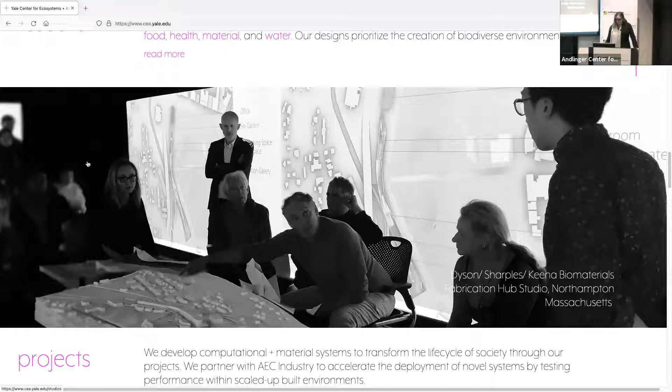And so even just the way that we look at things, we're developing new formats here as a studio in what we're calling BEAM Lab, or Built Environment Ecosystems Measurements Lab. I'll show that in a minute. And the way that we work, we've started by creating formats that are immersive, within which we can literally inhabit and understand the information with multiple people looking at it through the baggage and the lens that they're bringing to the table through their disciplinary and cultural backgrounds.

And then our first pass is, can we be under one roof, quote unquote? That was a term introduced by the Department of Energy with their big hub competitions, probably 15 years ago now. But that idea that we could have many different folks working in many different aspects. This is just a snapshot of our space, a studio where you can see there are PhD students, postdocs, research scientists, and also some design students working on different systems. They're working on plant-based air and water remediation systems. They're working on solar energy systems, but they're kind of in the same space.

So it sounds really basic, but can we occupy labs that are literally transdisciplinary, or spaces that are transdisciplinary? Of course, there's a lot of people that we work with, and the majority of the people we work with actually are not architects by training. This is just on our website, sort of the core people that we really work with day in and day out. There's a lot of other people associated with our center that are sort of the networks that each person brings to the table.

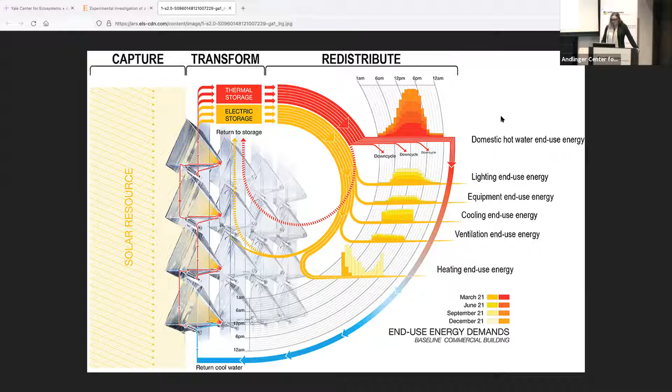And of course, you need very high quality energy coming from our conventional systems, electricity, and maybe high temperature heat to drive systems for all the things you need to do inside a building: heating, cooling, lighting, plug loads, etc. So how can we basically look at it as we are shaping energy flows, that we think about our buildings as literally transfer functions, or as building envelopes that are interdependent with the outside, and that we're going to mediate what's coming inside, i.e. on the left-hand side the solar resource, with all of the different things that we need to do on the inside.

So when we look at that, what can we do with existing technologies? This is literally an applications type of research, right? We're taking optics, semiconductors, other things that are doing pretty well on their own, trying to gang them all up together. We hadn't previously been in fundamental materials research, although we've moved over to that as well, trying to embed these ecosystemic criteria in the development of the materials themselves.

But ultimately, we've still got something like over 71% efficiency combined heat and power, if we look at what we are able to do with existing systems. But once again, at the end game of that, we're only taking care of a small slice of what we actually need to do inside the interior.

So just to go back a little bit to the context - what is the driving motivation behind this research? We tend to categorize our research in these different categories, but as architects, we need to have all of these categories and integrate them all into systems. We need to decide what the materials will be, and deliver safe, reliable energy, safe air and water quality, etc.

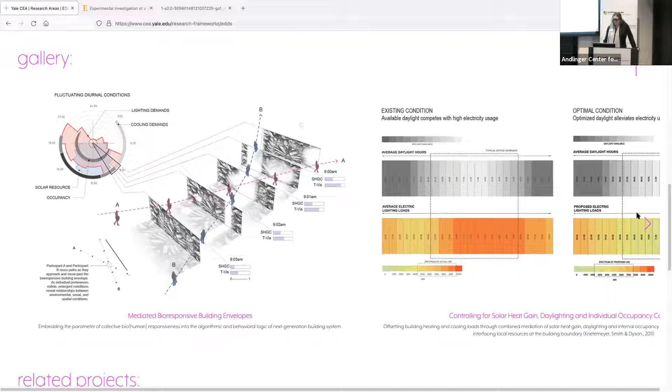Taking the exact same criteria, how do we render that building on-site net zero, or work with the type of energy that we have ambiently? That starts to send us into really looking at a kind of bioresponsive framework, tightly coupling in time lighting demands, cooling demands, and other interior conditions. But what do we have to do in order to have enough handles on the energies simultaneously?

We have to go literally all the way down to subatomic scale, and we have to think about how we are going to manipulate those energy flows. Because if we want to get to on-site net zero, all we really have is what is at that building envelope, and how we are going to couple that, or match it, with the interior conditions.

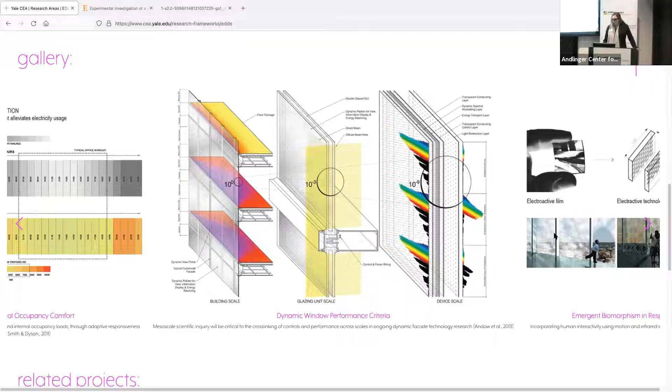So this is another visualization of how a micro scale system would work. Here we're still in the micro scale - we're not in that very, very small scale where we can do many things, but we can do a lot more than what we just showed with the IC solar facade system, which is literally just assembling the optics, the semiconductor, etc.

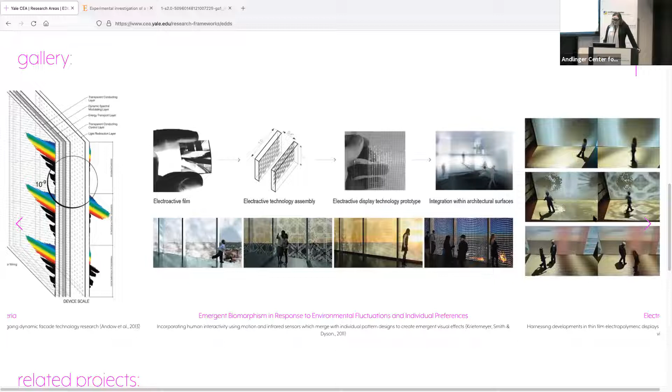What we can see is that if we want to manipulate the energy flows, there will be a relationship for sure between what we see and what we can do as a kind of cultural artifact - as we showed at the beginning, what the world will care about, and what architects will ultimately specify will be a cultural product. It will be something socially valuable, either as a technical condition or as an aesthetic or cultural condition.

But if you think about what we do on a building envelope, we do not at all need the same things throughout, let's even say a diurnal swing. We need very, very different things. So developing materials that can absorb or capture, transform, store, and redistribute these energy flows according to a lot of different criteria is really where we're at with the research now.

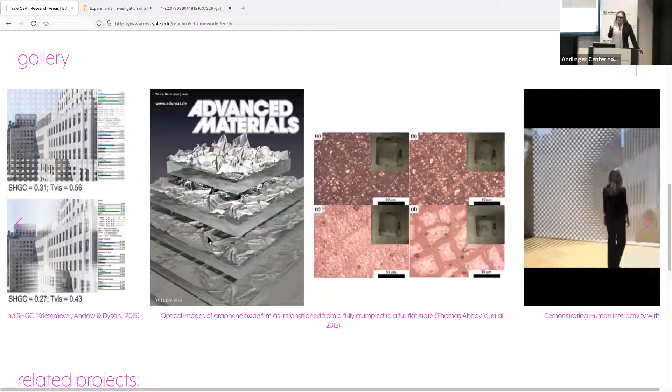Going back to the scientific formats, we will publish maybe one aspect of it. This is just one format where we're looking at trying to disassociate, in this case, the visible transmission from the solar heat gain coefficient, or other types of things. Put in simple terms, you might want to either absorb heat or reject heat, but you might want to keep your window clear, or you might want to have it opaque. Those types of things might want to be disassociated, as just a simple example of what we would want to do on a building envelope.

Ultimately, to provide a condition that is both technically - i.e. dramatically lowering energy consumption, carbon footprint, transforming the available clean renewable energy - and meeting what the cultural requirements will be, let's say for privacy or for transparency or for comfortable daylight. So you can see there are so many different criteria that we have here in that building envelope.

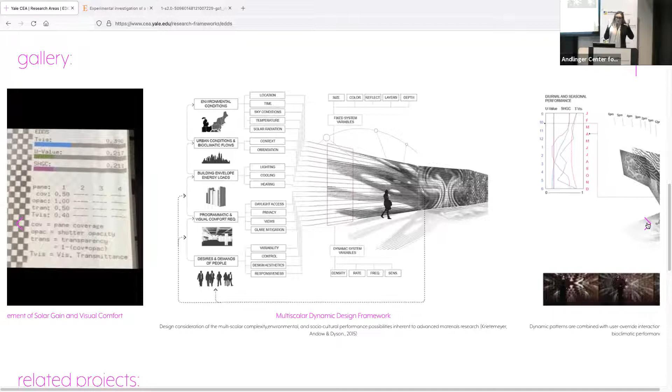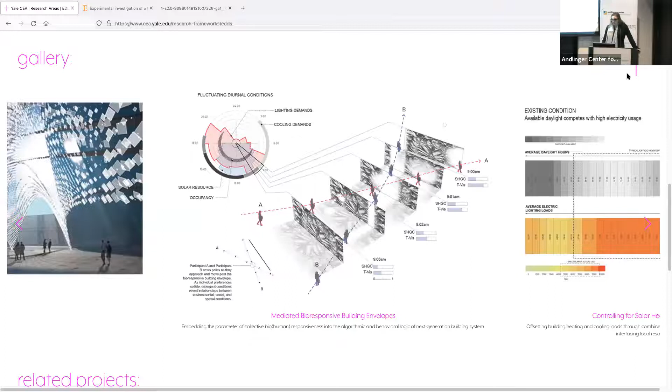If we were literally going to stretch that energy, what I guess I'm trying to say is that a lot of times we might think about it in a purely technical framework. But when we start to look at that intersection, and embed many of these social criteria into the lab and into the development of materials, we can now start to see that we gain so much value that was unanticipated - that these kinds of materials and systems do things that might not have seemed valuable within another framework for development criteria, but become very valuable when we think about it in other terms.

So just going into ultimately, we've got the research coming from so many different fields, as we've said. If we had to think across biotic and abiotic systems, multiple scales, ultimately we've got a very complex network of interrelationships of flows, of information flows.

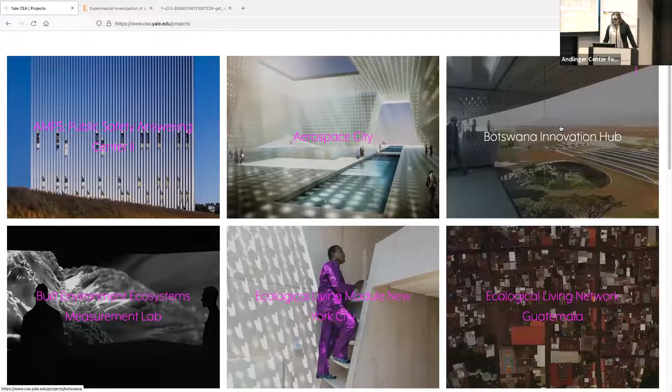But what is really tricky for us as architects is we know with all of these systems that we cannot just test at one scale. We have to be testing at multiple scales. Typically the kinds of tests we are effectuating go all the way down from the smallest of clean room scales, at that nano, into some sort of micro scale of a small chamber, then a larger controlled chamber, which is a room. I can show that right here.

In the Public Safety Answering Center as an example. And in this case, we're going into what is probably the largest terrestrial environment that we have to keep quite controlled. The reason why we're controlled in the Public Safety Answering Center here, this is in the Bronx, you're looking at the interior, is that it has a programmatic requirement to shut off the fresh air intake in case of any type of compromised event on the outside.

We can think of 9/11, we can think of Fukushima, we can think of all sorts of things that would be compromising, and this is basically the control command center for Greater New York. It's the redundant one. The last one was in the towers, which is one of the reasons it was so chaotic following the attacks.

But this would be an example of where we could potentially shut down—we have the ability to shut down this whole zone. So it's a zone within a building. And this is literally a scientific experiment. It doesn't look like it, right?

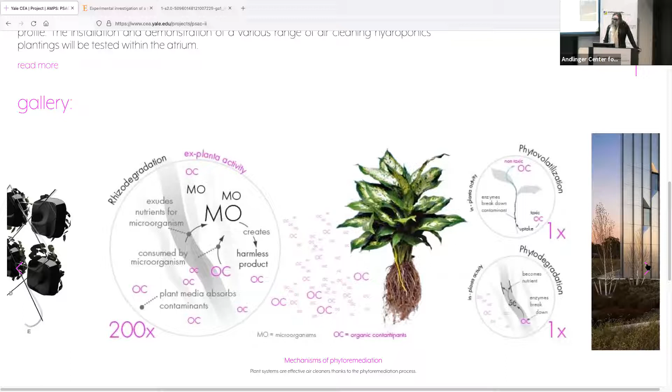But what we're doing is we're trying to interrelate and test the relationship between all of the different constituents of the air quality, and how these organisms—in this case mostly the rhizosphere, the microbial conditions within the rhizosphere—are reforming some of the problematic aspects of the air quality. A good example would be VOCs.

So we'll show that as an example of how we parallel track a building like that, which is pretty much an open system. Our buildings are very open. We try to pretend that they're closed when we're counting the HVAC and other things, but typically what we've been doing, all of our sort of mechanical paradigm, is we try to minimize entropy production.

We're trying to minimize losses, right? So we're throwing a lot of energy at an HVAC system, and then we try to create maybe tightness or insulation around different envelopes, et cetera. But in this case, we're inverting the condition where we're literally using that idea of a closed loop system—which is really not closed, as we said, but we pretend that it is—in order to test, can we actually remediate or produce the fresh air from within the building?

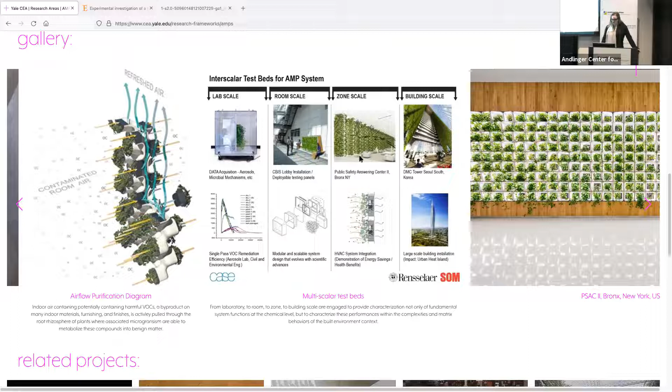So there will be all sorts of constituents of the lab that we'd have to test in a very controlled environment. We might be lucky and have certain room scale environments that are very well-controlled, or we can create a somewhat controlled condition at the room scale, but that's going to be less controlled. As we start going out to the building scale, we get less and less control over the inputs and outputs within the system, and really start to understand those relationships between variables.

But here we are at PSAC 2, as I said, in the zone scale, where we're really at that zone scale. Why is it interesting for us to be there? Well, it ends up that it's interesting because we're able to literally test with people. Before I get into the case study, I'll run through a few more projects to show how that happens, how we look at that relationship between behaviors and people.

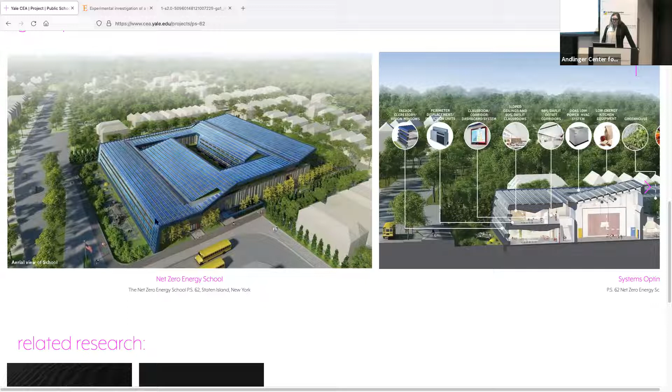I'm just going to use this example of the public school 62. This is a very interesting project, and it does absolutely highlight the limitations of our existing systems and the motivations, because although this was the first zero energy school or institution of any kind in the Northeast, it requires almost a football field for on-site net zero. It's not necessarily a prototype for so-called ubiquitous or general application.

We can also see that each system is developed kind of independently of each other, and they're put together. But you could imagine, fortunately this is quite a windy site, but in a hot, humid environment, if the wind is not blowing, we're going to have a tremendous amount of waste heat around these dark surfaces that might actually drive up our air conditioning, the exact opposite of what we're trying to do with an on-site net zero.

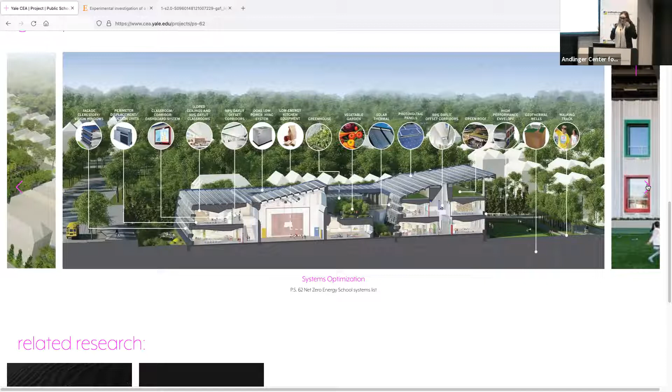So you can see all the conflicts that are involved in all of these systems. They cancel each other out. They don't really work well together in the sandbox. But this is an example of where we're at, literally, with the existing technologies.

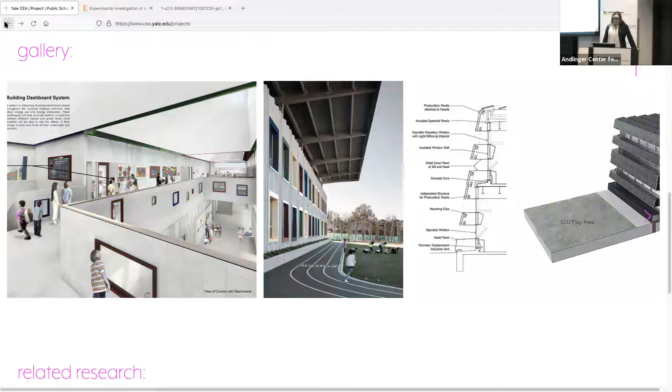If we were to then go into an environment... let me just go back to the project. So another maybe more productive case study would be something like...

Botswana Innovation Hub, where we don't have a pre-existing grid. So there's a tremendous opportunity here to really rethink that relationship between the context, the natural context, and all of the different ecosystem conditions within that.

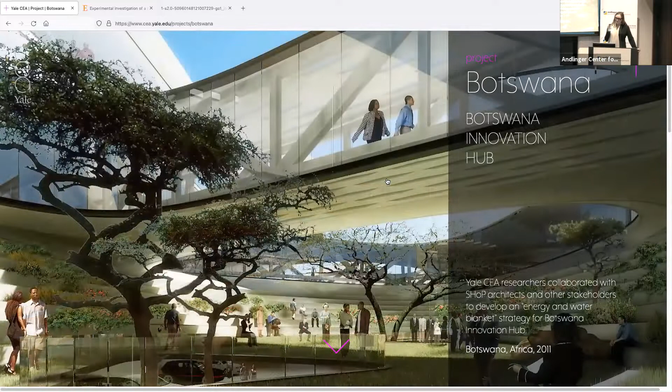And so here in Botswana we can see we are visualizing a lot of emerging systems that we actually didn't have sort of ready. That solar facade that you just saw in renewable energy was visualized and calculated for these clerestory windows that you see, and we weren't quite ready in time. So this is another really important thing about the built environment, is that we need to think about our buildings as being evolutionary and adopting new technologies as they come.

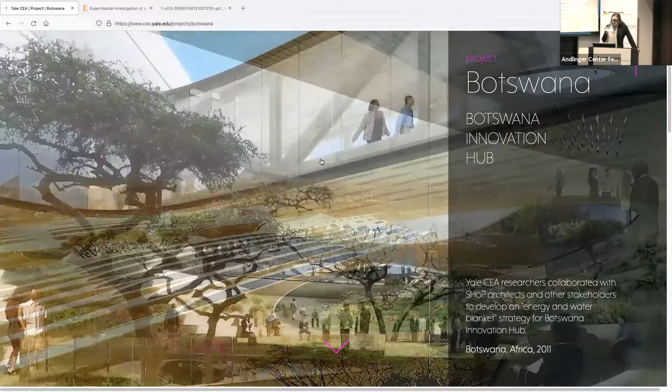But this is a very interesting case study too, because once again you can see that we're thinking about it from scratch. We are not dependent necessarily on a lot of entrenched interest in the grid or in what is happening there. So there's an opportunity to rethink on-site net zero more considerably, although it was really the limitations of the technologies themselves at the time of construction that limited that.

Now, finally, probably the most precipitous... I think I'm running out of time, right? How many more? Oh, okay, yeah, so I think I'm going to move over to my PowerPoint in a minute.

And I would say that what is really, really critical that we think about is what will drive... what are, for us, because we come initially from, in a sense, the deployment sector and architecture, we think about what will drive, in a sense, these transitions, and what are the major, let's say, hiccups to all of that.

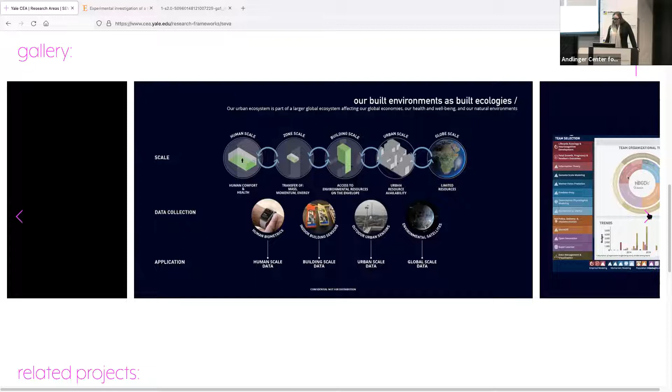To be able to create these semantic frameworks, where we can start to get analytics and metrics, all the different ways of modeling things - it's hard to see this, I apologize, but these are screen captures from SEVA, or socio-ecological visualization analytics, which is literally the virtual framework in order to get these vastly different disciplines and folks working together.

You might have many different ways of modeling similar information. How can you literally start to understand - we have these fitness tickets, fitness around data, so that you can really understand the context around both data acquisition and models, and be able to trade them across really unlike disciplines. And so we're creating also that kind of global framework.

This happens to be with the Gates Foundation with their Healthy Birth, Growth and Development Initiative, where we can start to literally understand that relationship between what we would call microdata - data scientists don't like us saying that - but literally the data acquisition, let's say from a biometric or from an environment, all the way out to the sort of aggregated statistics, or very large data sets, or historical data sets as well. It makes, in our view, historical data even more relevant if we start to be able to create these frameworks for contextualizing it in the context of new discoveries, and in the context of more information into the system.

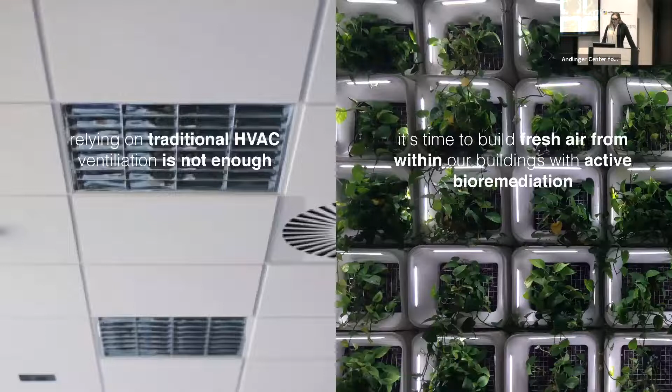This is a nice image, I think, that shows our challenge as urbanists and architects. An image like this is literally showing a biodiverse airstream, and look where it is—it's certainly not within the canyons or the lower levels of urban environments and buildings. So we're shaping our biodiversity within cities and buildings.

Going back to this really interesting data, there's great data coming out of Switzerland and Zurich that shows, not just in high-rise environments like New York City, but in a low-rise environment like Zurich where all buildings are similar height, they've correlated life expectancy to the floor on which you're living. That's actually largely an issue of the problem you have in these low-rise environments—you have a lot of skimming flow.

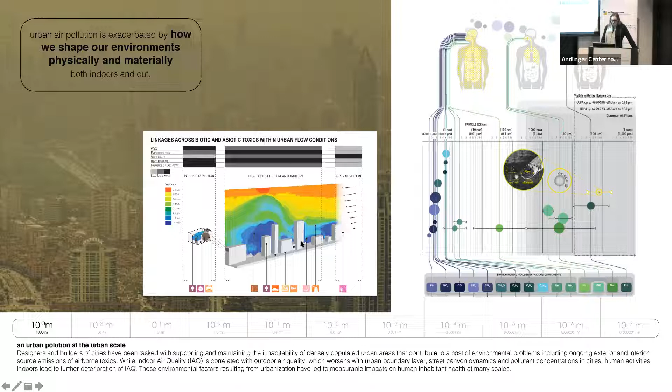So you don't have to be living in an environment like New York to be missing that really good ex-urban air quality stream.

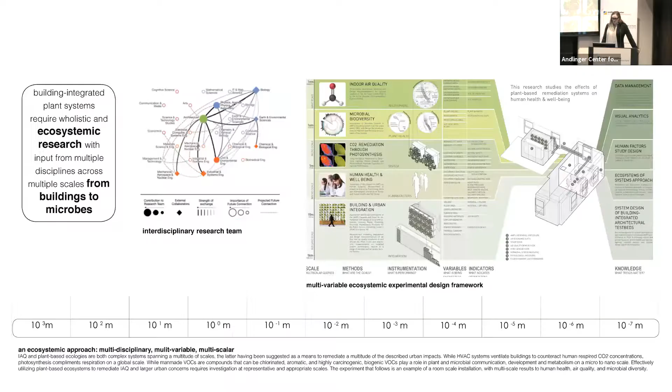One of the big questions is something we know we cannot take care of, even if we wouldn't think about microbial diversity. Certain things like VOCs and others are just not well taken care of by our buildings.

Ultimately, we're designing buildings for humans, for human beings largely. But what we're trying to do here is say: within occupied spaces, if we had to construct an ecology, if we had to build an ecology that would be biodiverse, what are, just to get started, within our live spaces?

Here you can see a conference room, and then a box. We call this the breathe box because we had to take the plant—we started these experiments with plants in the environment, but we immediately saw there was a biophilia reaction.

Some subjects, especially in the middle of winter, would just look at a green wall and we'd see a response in breathing rate and heart rate variability. It was really incredible, so we had to start running these studies without the subjects even knowing the plants were part of the study—they were completely in another chamber.

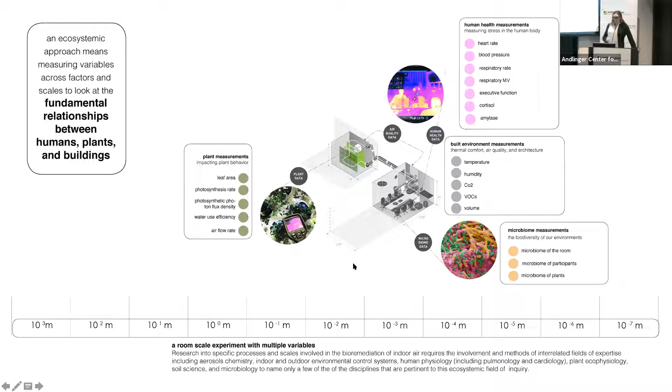You can see all the different types of measurements we're taking: the human health measurements, the plant-based measurements, and the built environment measurements. And then, of course, the microbiome, which is kind of an interrelationship between all three things, because we start to get a lot of mixing from the outside—there's some mixing from the outside, a tiny bit, for what we're doing.

Ultimately, this is maybe an easier way to say that. We set this up for PSAC 2, for that big green wall you saw earlier, because this was just a pilot study to try to prepare for potential longitudinal studies that would involve hundreds, if not thousands, of subjects over the course of quite a long time in the PSAC 2.

So we really were not expecting to find anything here—like, what are we going to find in three days, right? The protocol setup was that we would have a typical fresh air supply of what you have. This happens to be a lab building.

It's in the Center for Biotechnology and Interdisciplinary Studies. So it's kind of what we would say the Maserati of HVACs, right?

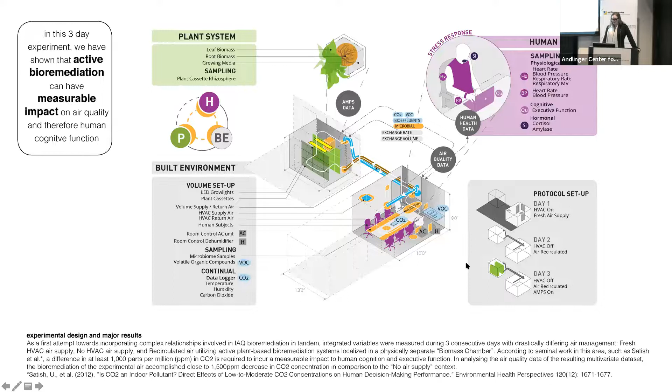It's 100% exterior air, upstate New York, beautiful stream that you're getting in there for day one. Day two, we have recirculated air, which would actually resemble many more of the environments than we think we actually live in, in our houses and in certain commercial environments that don't have adequate exterior air. Then on the third day, we're pumping air into that chamber from the breathe box, from the plant wall. This is an example of how it was set up — a little bit of a jerry rig, because it's a pilot.

Here we are inside. This is long-term research showing that because of the surface area of root rhizospheres and the amount of activity in the root zone, the majority of the action is happening within the so-called growing media — you can call it a soil, although this is an engineered growing media. We were quite shocked, I must say.

Immediately, one of the very low-hanging fruits we wanted to show was that within a proper proportion of humans, plants, and an environment, we wanted to dissuade the EPA from continuing to say that plants would not have an appreciable effect on the environment at scale. So really quickly, could we, in a period of time, reduce the CO2 levels by 1,000 parts per million — because that is the amount that has been determined by Satish et al. at Harvard and Syracuse to be the amount that would affect executive functioning and potentially long-term health outcomes over time.

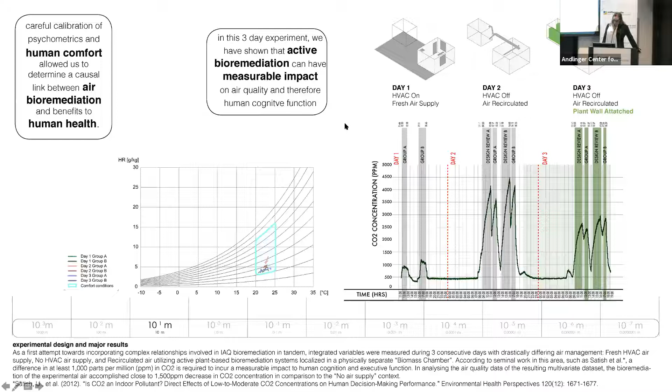So that would just be the low-hanging fruit. Can we provide a better environment? Can we reduce the CO2 levels? We were reducing the CO2 levels within an hour by 1,000 parts per million. So that was a very quick thing.

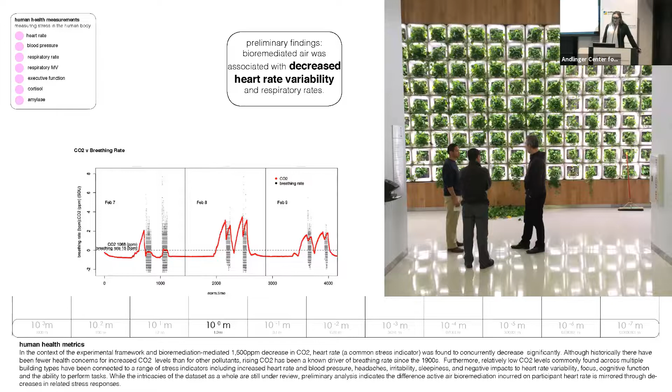But one thing we were very surprised to see is that within 20-something subjects, within an hour, there was a statistically significant impact on both heart rate variability and breathing rate from the plants. That was really, really surprising to us — no one, least of all the cardiologist from NYU who was running that whole aspect of the human factors, expected it.

I apologize that I don't have the group — I should have a group slide of everybody involved here. There were people taking cognitive tests, cognitive scientists, physiologists, aerosol chemists, and many different people interfacing and setting the protocol for this test. And we weren't expecting that result.

Then it became a question of how are we getting that result? What is happening? Is it really the CO2 that's changing that? We decided that, even based on the literature and what we could know, we couldn't be sure it was the CO2 that was really making that very quick change. So it had to be something within the air, but we don't know what it is. Is it microbial? Is it the so-called aerobiome? There's a lot of hypotheses emerging as well about the concept of living water or living air. So we still obviously don't know — these are big questions that we have.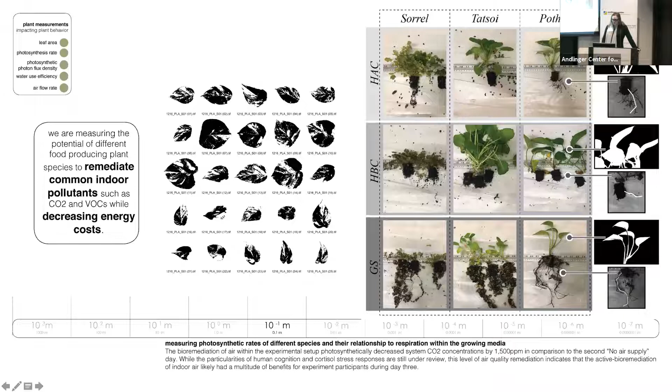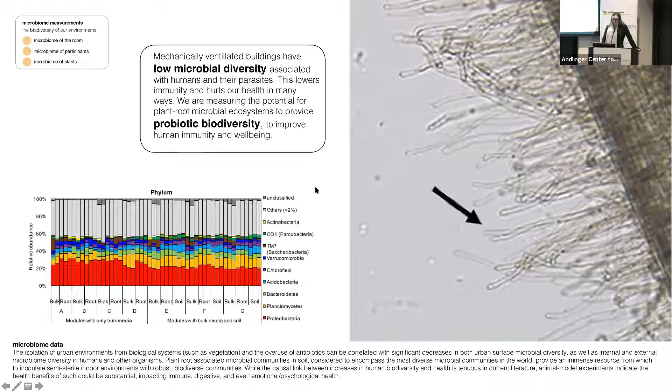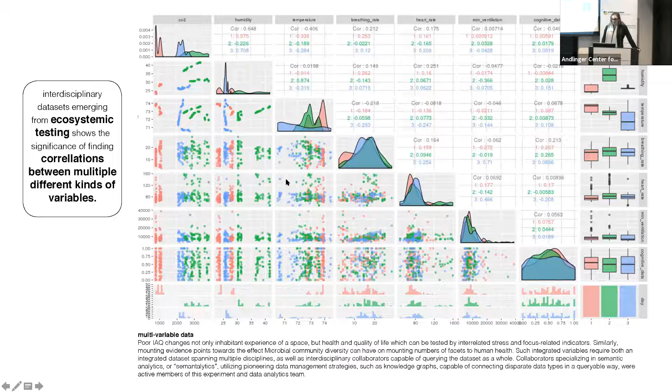So we interface with biologists, plant physiologists, soil microbiologists, and others to really start to understand what these relationships are, what the interrelationships are, and how we can start to correlate findings. Very early days, and in a way quite slow, because it's very hard to get all these folks together to be looking at something simultaneously. And what would be the point of doing it?

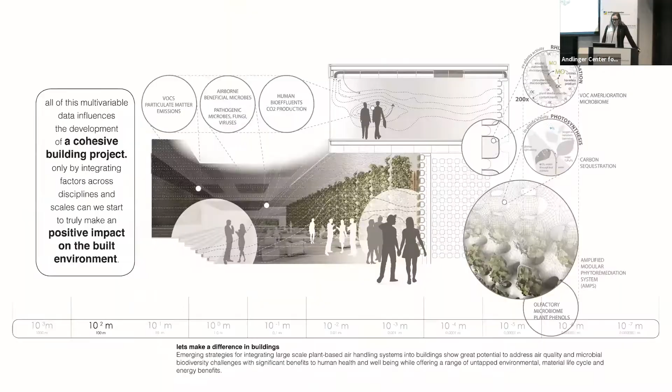Once again, we come back to our starting point: because we are architects, we're working backwards from the ecosystem. We're saying we have to deliver this ecosystem. If we don't know why, for example, we're able to affect heart rate variability or breathing rates, then we're going to have to chase it down. We're going to have to figure it out, because at the end of the day, we are responsible for that design, and we're responsible for that system, and we have to sign off on it.

So going back to PSAC 2, to scaling up — there's obviously a lot of questions socially about reintroducing living systems within a built environment. They're dynamic. One of the main reasons we've designed buildings and cities to sort of keep out living systems is that they're unpredictable. They're dynamic, and they have a maintenance requirement.

There's the issue of predictability, or sort of a pretend stasis. When we study statics and strength of materials, we pretend that things are going to be quite durable and very predictable. That is obviously not the behavior of living systems. So having to design with and flow with the behaviors of living systems is a whole challenge, both technically and socially.

Every time the droppings fall on the floor, folks from inside the building are sweeping them up, even though we don't have to actually sweep them up. They take them to their desks and put them in water. So this wall is spreading out throughout the entire building even before we have replicated it. Everyone's asking when the tomatoes and other vegetables are coming, when are we going to convert this to food growing? That's an amazing anecdote for me, because we can't wait.

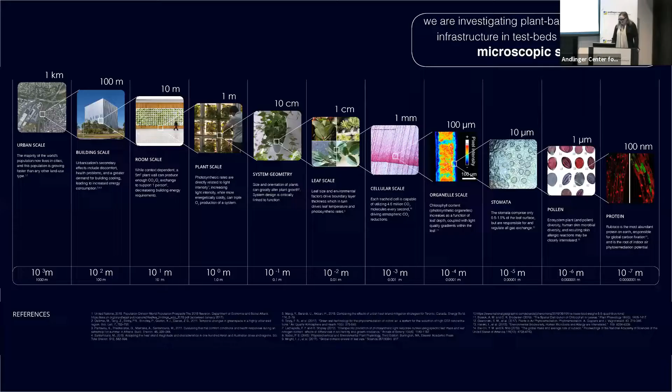Yeah, that's in fact exactly what this one is. Everything's moving through, I showed briefly an image of the back of that. This is completely connected to the HVAC system, and there's a plenum behind this. Unfortunately, I can't show everything with PSAC 2 because it's a classified building, so we're not allowed to show the plans and sections, otherwise I would absolutely show that. But there is a plenum wall behind it, and what we are doing is exactly as you point out, testing the flow rates and the relative residence time that we need with different types of processes.

So for example, maybe one of the holy grails that NASA was very involved with, which is the reformation of VOC molecules by the root rhizosphere, that really requires a certain residency time that is not going to be achieved with the kind of flow-through rates that you have in typical HVAC or the volume. So this is a classic case of where we're thinking about, like in PSAC 2, pulsing, or being able to have a different type of pulsing flow that is associated with plenums, different from what you have in a typical HVAC condition.

There's also, trying to think about that relative to parallel tracking with the diurnal programs that you have. This is a 24-hour building, for obvious reasons, because it's a safety answering call center. So that's going to be tricky, but that's one of the biggest issues.

The lowest hanging fruit, of course, is CO2. That's why we were showing the data on that. Reducing CO2 is something we really do feel is kind of basic. The much more difficult things are reforming and remediating.